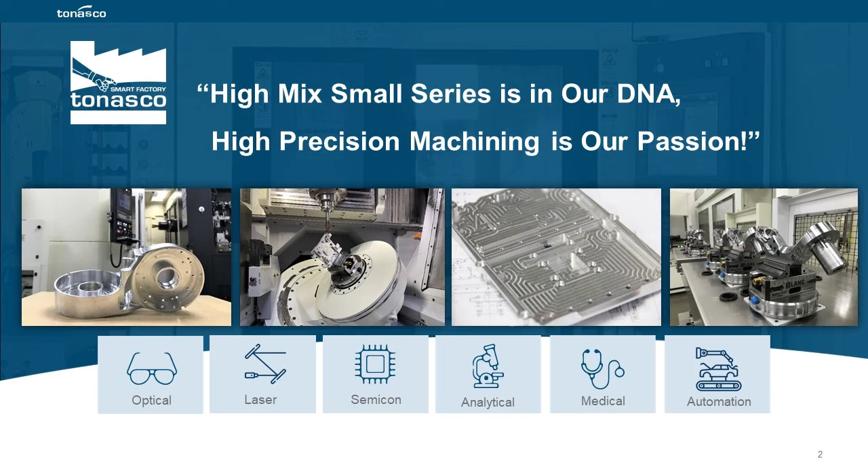And that's also why we have automated in the way how we have automated, which I will share some more later. We are good in very complex machining, high quality CNC milling, CNC lathe, and wire EDM. And we are active in a lot of high precision industries, from optical, laser, semicon, analytical, medical, and production automation.

We have implemented a lot of Industry 4.0 features, capabilities. But actually the funny thing is, it never started as wanting to implement Industry 4.0. What we wanted was to invest in high-end machines, and we saw that in order to make money with these machines, we need to automate.

And then slowly we started to add the rest of the things to it. So we have automated, fully automated, a robotized factory.

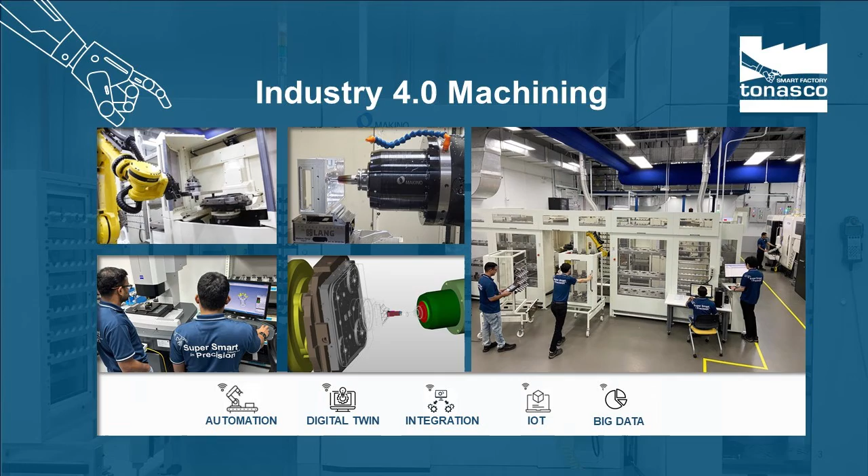We are simulating everything that goes to our factory. Most of the software is integrated, so most of the data flows from one piece of software to the next without anyone having to type it over or copy Excel sheets or any of that. And all the machines and all the equipment have IoT capability, so we are collecting a lot of data, and at this moment we are ready to start harvesting that data and doing big data analysis on it.

In this slide, I want to share what we have. You can see our hardware in the factory, but actually it's a lot more than the hardware that you see. Most of the work in this Industry 4.0 is not in the hardware, it's in the software behind it. So it all starts with our ERP system.

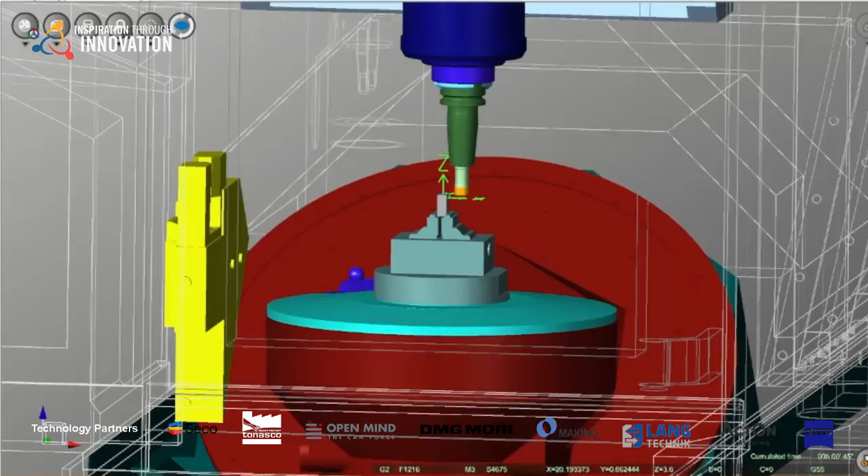The ERP system creates a job. That job goes to the CAM programmer, and the CAM programmer creates the CAM program. Then the CAM programmer simulates every program that he makes, so we can catch as many errors as we can in the office. That is first to protect our machines, so we don't have crashes, but also to find any mistake that we have made. This is all to get the maximum machine uptime.

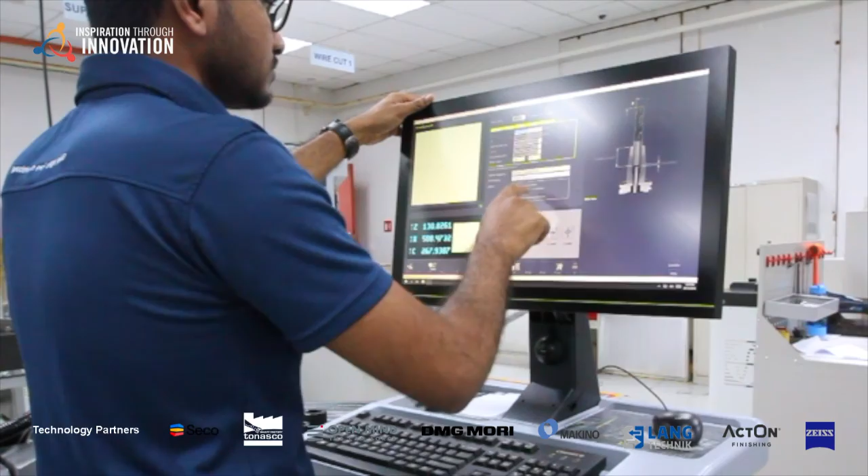Then we have tool management. We have all our tool data in a Zoller tool management database. That is all the 3D models, but also all the cutting data. And this is used in our CAD/CAM, but this is also used for our tool presetting. And this data is also sent together with the tool to the machine. So this is a very important database for us.

Then that goes to job management. As I shared earlier, we are high mix, low volume, so we have many, many different jobs. With this job management, we have a lot of flexibility. We can run different parts on the same machine in one night, and this job management software will plan that for us and manage it all for us.

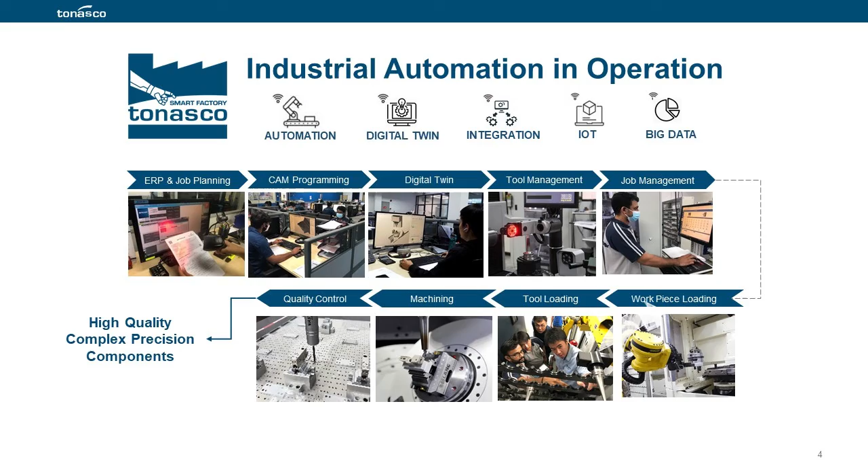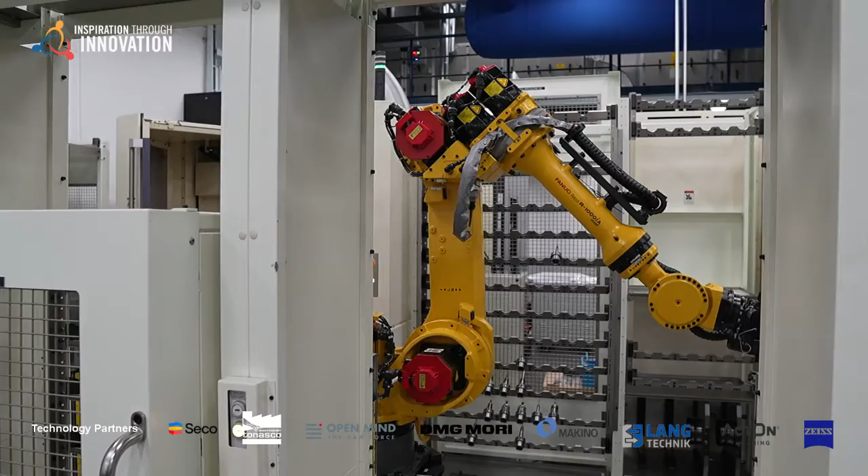Then let's go to the shop floor. We do our workpiece preparation. All our pallets have RFID chips, and all our workpiece offsets are linked to that RFID chip. Then we go to tool loading. All our tools have a QR code, and all our tool data is linked to that QR code, so the tool offset, but not only the tool offset, also parameters. Our tool life of that tool is tracked.

Does the tool use through spindle coolant or not? And then that all goes to machining. We do all this because we want to machine. Before we start to machine, the robot loads the workpiece, the robot sends the NC code to the machine, and the robot loads the tools to the machine, but also sends the offset data and all those tool parameters to the machine. So all this goes automatically to the machine.

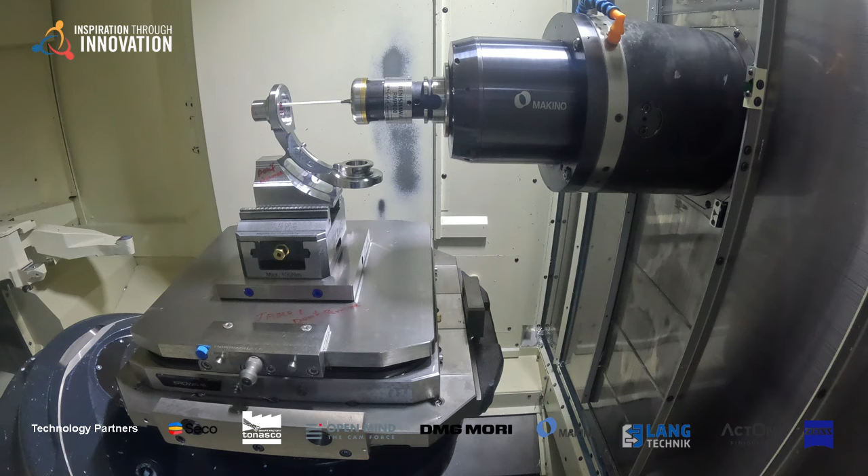In the machine, we can do quality control. So we can do probing inside the machine for the most important dimensions. And the rest we do quality control on our Zeiss CMM in our quality control department.

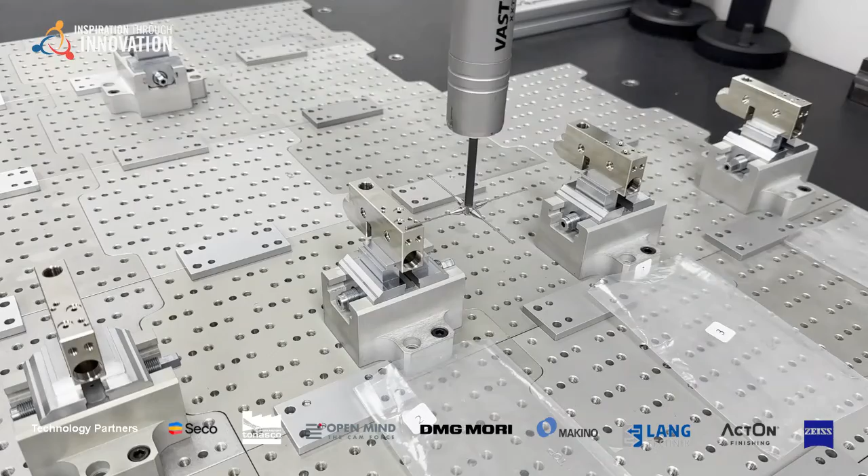When this process runs, we are generating a lot of data. And as I said just now, we are now far enough with the implementation that we can start to harvest this kind of data. The easiest is, of course, machine utilization. So we can see how often the spindle runs, how often this machine is working. But our target is to also capture the sensor data, so we're able to optimize our cutting parameters.

We have many customers visiting us, and especially our European customers are every time asking us, why on earth do you invest in so much automation in Malaysia? Aren't you here because of the lower labor cost? We invest in this automation because we really see that it gives us benefit.

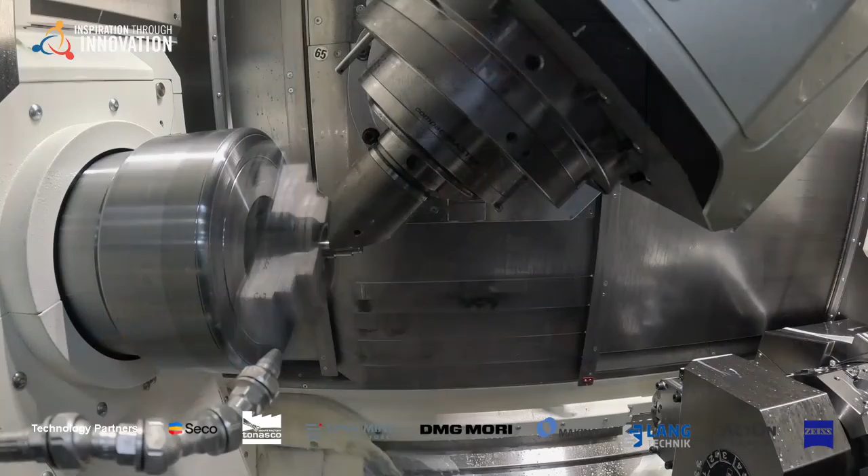This automation together with a 5-axis machine gives us a lot more capabilities. We can do 5-axis CNC milling, 9-axis mill turn, and these machines are very expensive. So my hourly rate on those machines is very expensive. And those machines have to run. If I have an operator in front of that machine, then I will never get that many running hours out of the machine as we now get with the robot.

With an operator, if we get 4,000 hours per year, that's really, really good. If I put a robot in front of it, 5,000, 6,000 hours we can get. Then we can actually make good money with these machines.

Some of the parts we run on our 5-axis machine that in the past we would run on the 3-axis with many more setups, and actually it's more economical to do it on a 5-axis machine because I can run many more hours, but I need to run the hours. Our factory runs really 24/7.

Reliability and efficiency, of course, that starts with our CAM simulation. And also the automation. By being less dependent on humans or less dependent on operators, I have less risk that someone doesn't come to work because he's sick, or someone resigns and I need to train a new operator. In all that time, my machine is down. Or we need to hire so many extra people that we always have spare capacity, which is also not economical.

High precision and quality. So we have invested in high-end machines: Makino 5-axis CNC milling machine, DMG NTX 1000. These are high precision machines. We bought them with very many high precision options, purely for us to go up in that market, to be able to do higher precision parts, more complex parts, to talk to our customer, to also get those very complex, very risky parts for our customers, to also produce that.

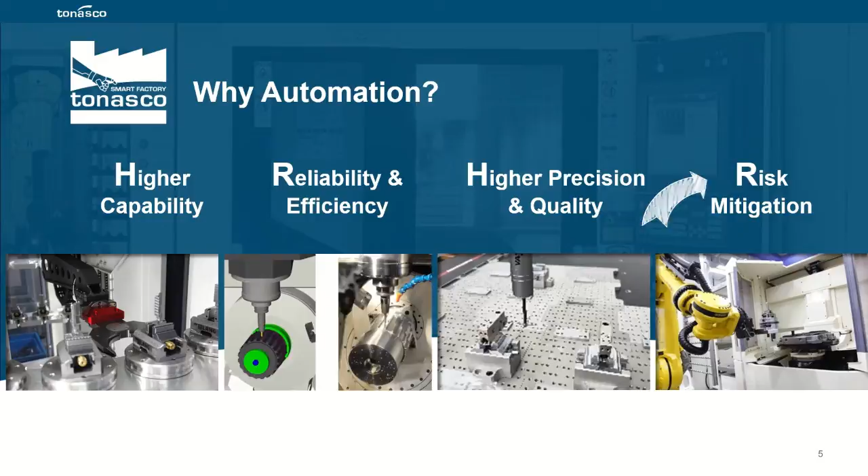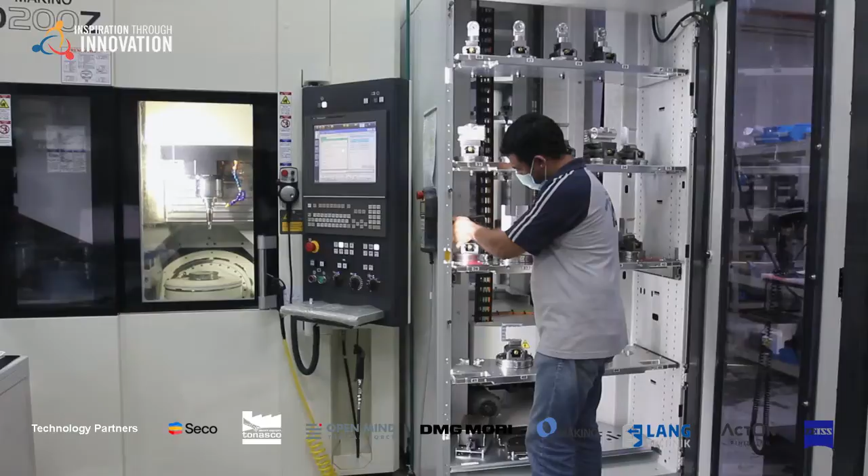And then the last one is risk mitigation. I always notice that when I talk to people about automation, it's all about hours output. But if you ask me, our main reason, our first reason why we have this automation is to mitigate the risk. I'm just less dependent on an operator. My machine can run as long as I have someone who can set the machine and who comes in just to clean the machine and make the machine run. So I'm less dependent on people.

Why we spend, for instance, so much time on our Zoller tool database, our digital twin, is because a lot of the knowledge is suddenly captured in the database. In the past, before that, every programmer had their own set of cutting parameters. And every programmer had the tool length he wanted, and none of it was stored. Now we have a fixed set of cutting parameters. If the cutting parameters don't work, we change it in the Zoller tool database, and the next time I make a program, I automatically have the right cutting parameters. So a lot more knowledge is stored in a database instead of in someone's head.

As I said just now, already it is a lot less risk that someone is sick or someone leaves, so I have a lot less attendance risk. And the last one, and that I find also very important, you see our environment looks good. We want to make this company attractive for people to work here, to retain the good people that we have, and to attract good people. And everybody loves to work with robots, and everybody loves to work with high-end machines in a high-end environment. So that is the last reason why we do this.

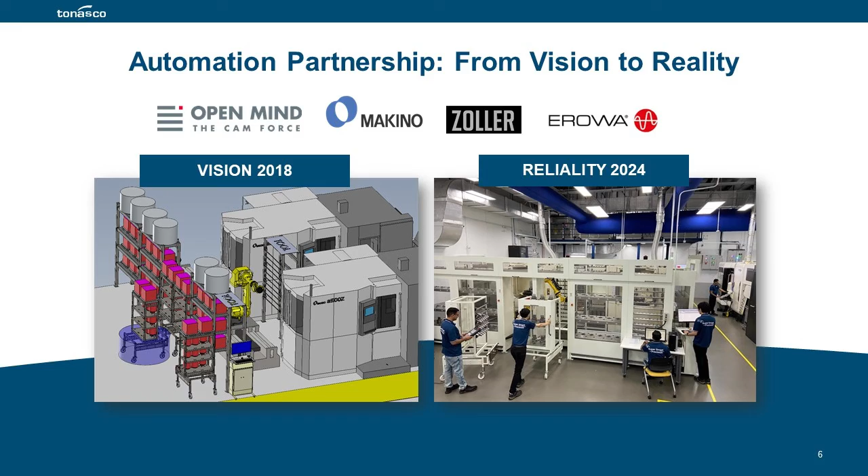And with automation and with Industry 4, we can solve this. But we couldn't do this alone. We had a lot of ideas, but we needed partners. And that's where we started to work with OpenMind, Makino, Zoller, Erowa to implement this. And by working together with them, we became as successful as we are today.

I've invited Simon from OpenMind and Samuel from Makino to later also share some things with you, because I want to continue with what challenges did we have, what lessons did we learn, but also what things did we do right. So I will first share some things from our experience as Tonasco, and then I'll pass the mic to OpenMind and to Makino to share their point of view.

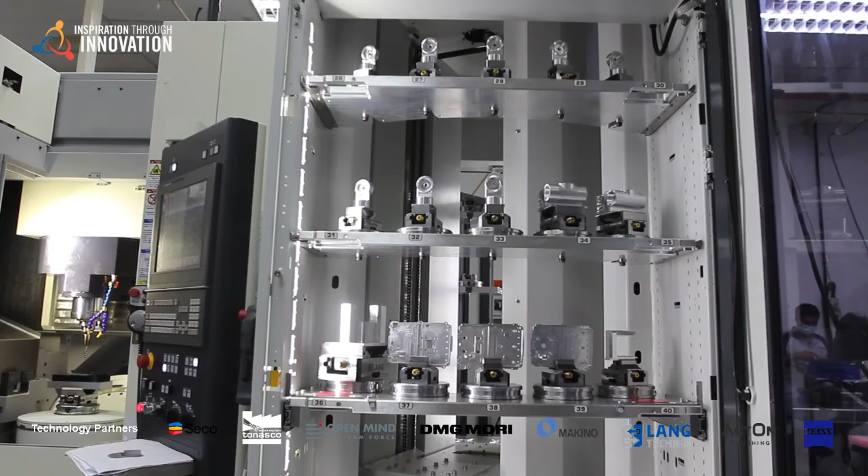So what we did right, absolutely right, is standardization. You cannot robotize if you don't standardize. So we standardized - everything is on a pallet. Everything is on an Erowa 0-point system. We only have the same type of vices. We only have the same type of tools. All our tool holders are standardized. Everything in our company is standardized.

Without that, I cannot simulate. Without that, I cannot automate, because I don't know what's going to happen.

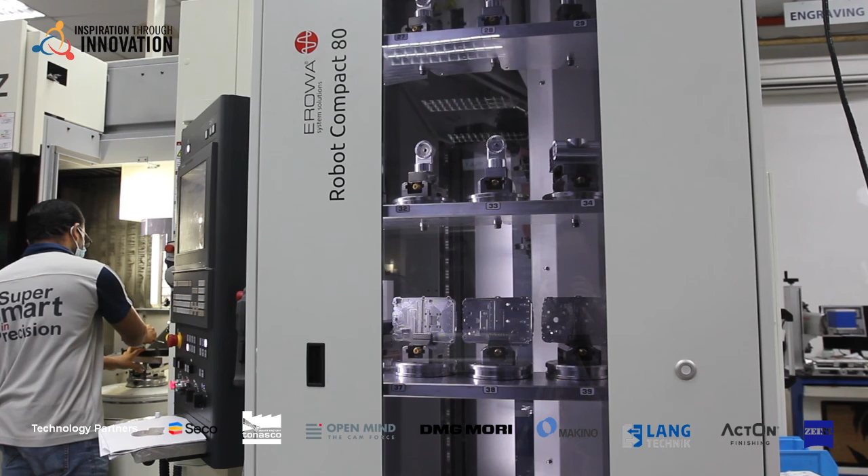Then, the next is, we started with one concept machine. So we bought a Makino D200Z machine with one robot for pallet loading and one robot for tool loading. And we got the concept right first. That machine we got in 2019, and we have worked until 2022, till the next machines came in. So we really ironed out many of the problems.

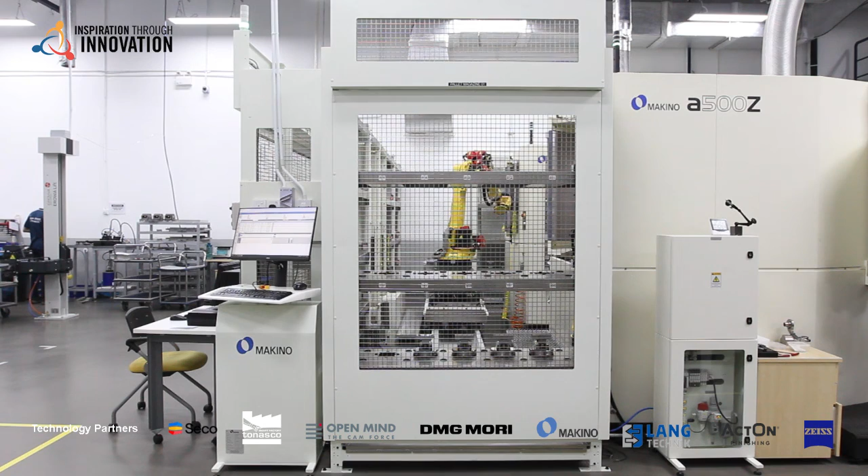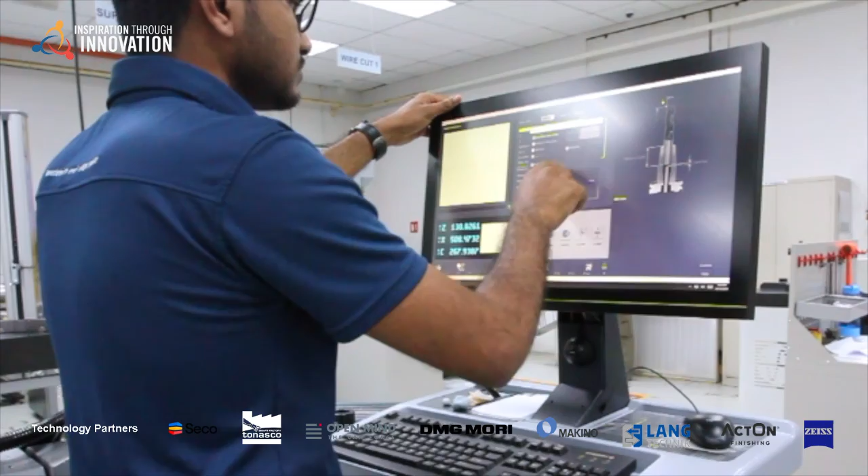And some of the challenges that we had was actually our digital twin, our simulation, our Zoller tool database. We thought when we started, okay, maybe 6 months to fill that whole database. How difficult can it be? In the end, it took us 3 years to update all the 3D models, because we needed to get all the 3D models. All the 3D models that we got everywhere were not 100% right, or when we load them in, it gives problems. And so we spent a lot of time on that.

Then we need to get the cutting parameters. Of course, I can get cutting parameters from Seco or from others, but we still need to test those cutting parameters and make sure that what we load into our database is really optimized. That took a lot longer than we had expected.

The last portion is employee involvement. We have from the start worked together with a small group of employees that were very involved. That went very well. I would say that we have done right.

But now we have the following challenge. We need the rest of the company to also get involved. And now we are really trying to figure out, well, how can we train the rest who has not been part of this journey for the last 5 years, but who steps in now and needs to know all the knowledge that is in the head of our people that was part of the core team.

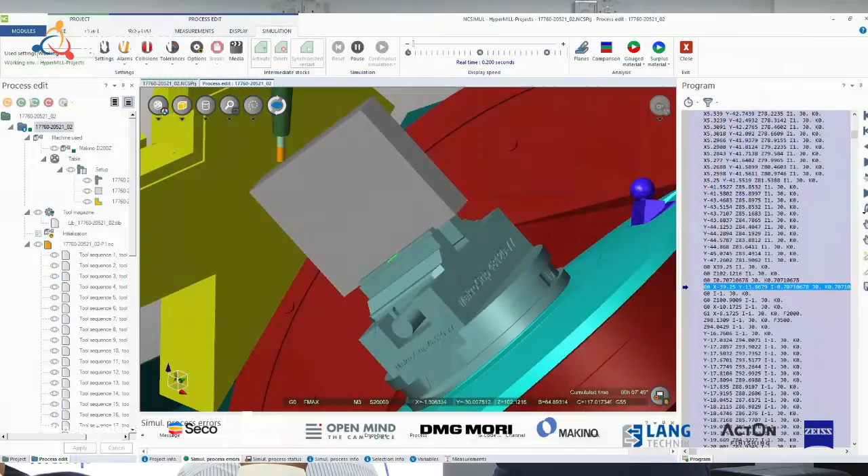And what we do realize is that this whole implementation, not only the digital twin, but everything, it takes a lot more time than I had expected. I think if I would do it again, I would probably get at least 2 or 3 engineers involved full time. Then we could go a lot faster and we can get all those benefits that we see a lot sooner.

The last point we have is manpower. If you go on this journey, not just automation, but especially that integration and that whole Industry 4.0, you need to be ready to get higher level people and different skill sets. We already started in 2018 to hire a different kind of people, higher level people. And even today we see that we still have some issues, that certain staff are very good in this, but cannot cope so much with that. It's very complex what we have put in place. We see that we have to change our job scopes, rearrange who is doing what in this factory. So this is what I wanted to share.

And yeah, I'm very curious what OpenMind has experienced during this journey together with us. So I pass the mic to Simon. Thank you, Toon. Next slide, please.

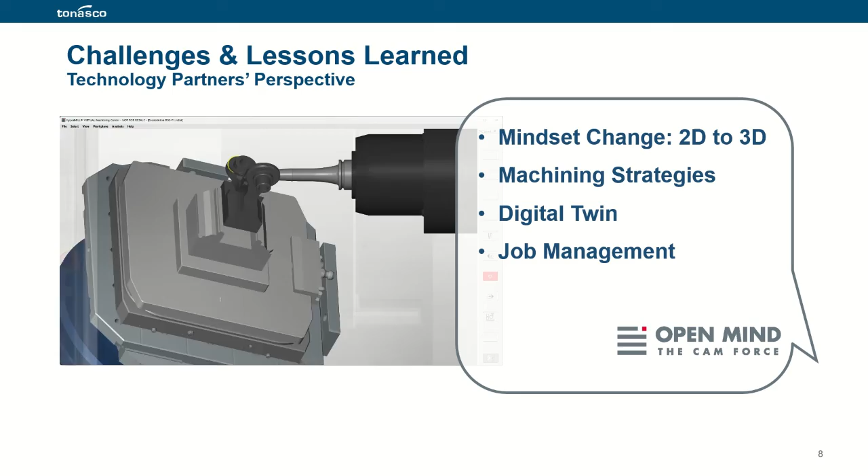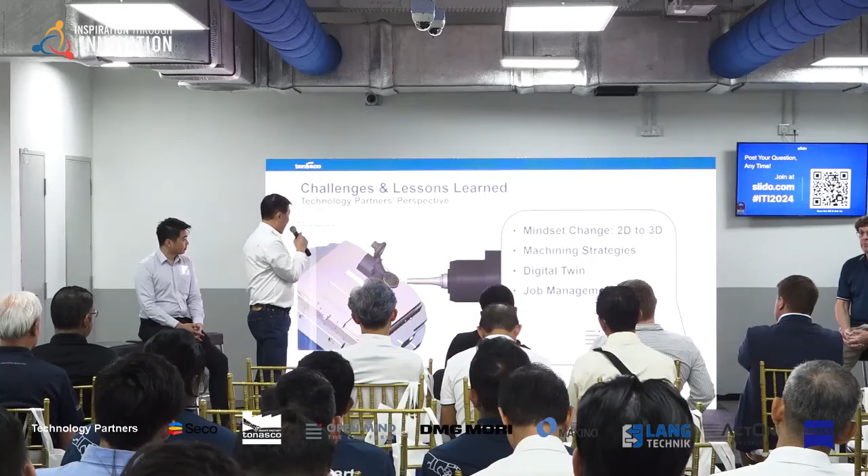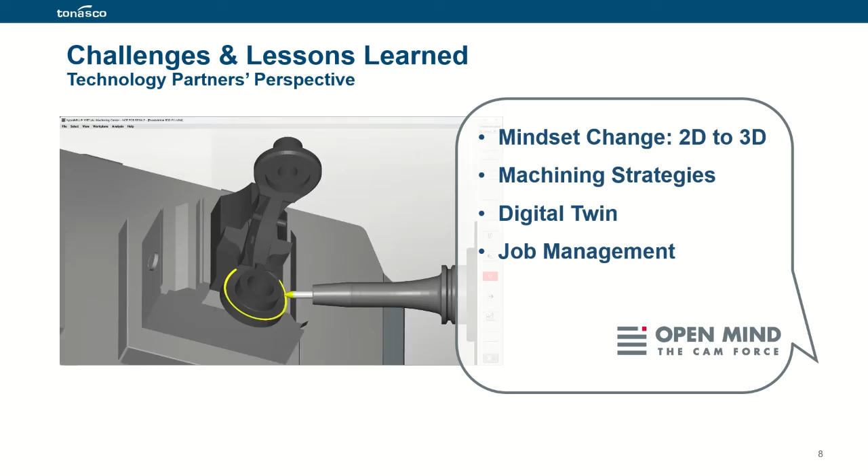Through this journey together as a supplier, OpenMind, and our customer, Tonasco, we have learned a lot as well. These are the experiences, the challenges that we have encountered. First of all, it is about the mindset change. So what does it mean by this?

Often, in the beginning, these people, the programmers that Tonasco has, they are good programmers, honestly. They have used the previous software that they have. They are so quick, they can produce the NC programs, and they are a lot more flexible to do whatever toolpath they wanted to achieve. But the setback is that a lot of time it is very much depending on the shop floor. They need to confirm and confirm again. So with this, it is taking time for them to do this, and importantly, it is very risky because there's no collision check on 2D program, with a 2D sketch.

So therefore, we have gone through a lot of time to tell them that it is important to use 3D, because with the 3D, including the tooling, this is why they are investing into the Zoller, to collect all the data of the tooling, and then it is used to check with the machine travel strokes and so on, in order to find the correct travel stroke, and in the end also using a good machining strategy that comes from hyperMILL, which is able to provide them with very nice 5-axis simultaneous machining. So this is in order to drive their 5-axis machine from Makino.

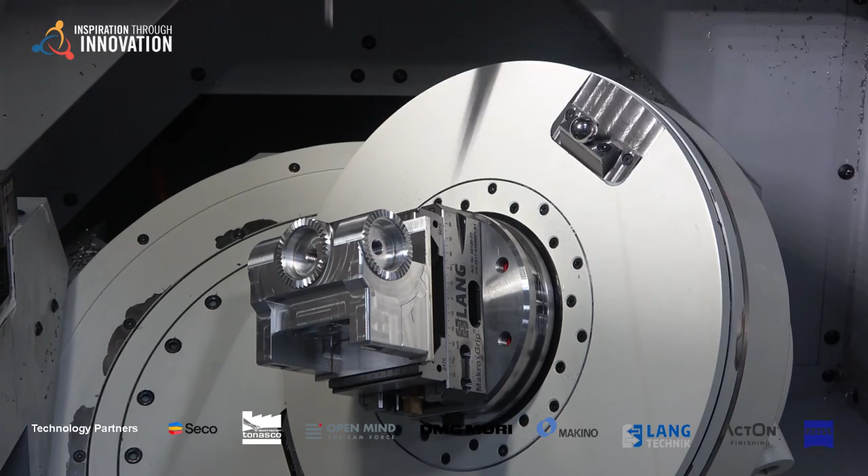This is what they are able to gain, but we spent so much time to debate why this is so important. In the beginning, they were just telling that their shop floor engineer would like to do the test, and then if this is not enough, they will manually prolong to make the tool longer or to make the tool shorter. So with this one, it is very, very dangerous.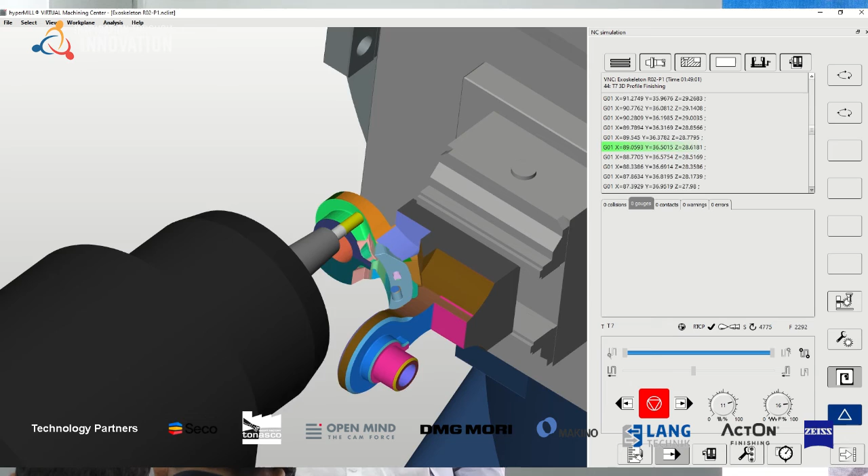Very dangerous. Therefore, they also invested into our virtual machining, which is a so-called digital twin, to confirm each movement, and also to give this kind of intelligence that the optimizer is able to decide: when the tool is coming from this direction and it is unable to reach, is there a second solution? So this optimizer is taking place to decide for the programmers. Therefore, the human decision is less. So everything is put into the system to check for a better solution. So this is about the digital twin that they can gain from this.

Finally, going towards the goal to achieve automation, the job management is the next key thing. So to provide this information, OpenMind also provides the important information so that this job management can carry on to provide the information for the next process. So this is where Makino comes in.

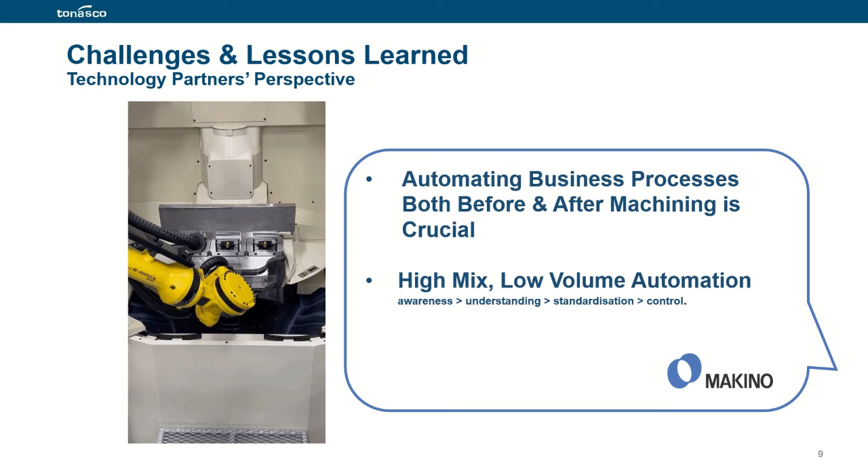Thank you, Simon. Samuel here from Makino. Thank you for this privilege to share about this automation journey. I think Mr. Toon has already encapsulated a lot of the points from earlier very well, in terms of how he standardized first and how he got his concept right first. So today, from Makino's perspective, we will just share on 2 points: the first being automating the business processes before and after machining, and the second being a high-mix, low-volume environment that we're working together with Tonasco to realize.

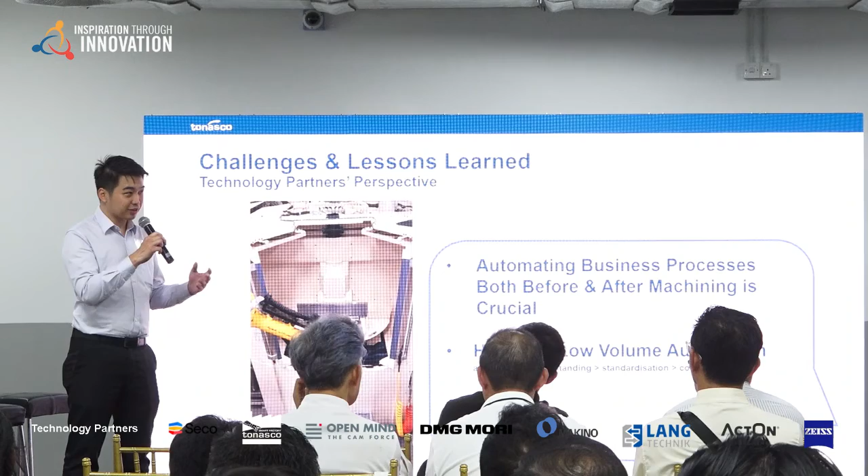So on the first point about automating business processes, that's what Tonasco experienced in terms of the time spent to standardize their processes, align everything, and connect all the software together, spending 3 years on the digital twin. Let's just say this is hardly rare, it's hardly unique to Tonasco alone.

It's probably not. So the automation journey, which includes your process digitalization journey, inherently takes time. If you look at your own company, essentially how you run your operation is like the DNA of your company. You want to be on top of that, not leave it to a software you have no control over. So here I'd like to do a shout out to Mr. Toon, because the other thing he's done right, which he didn't mention because he only mentioned his employees, not himself, is that he's been very hands-on from the beginning all the way until now, as we are learning together.

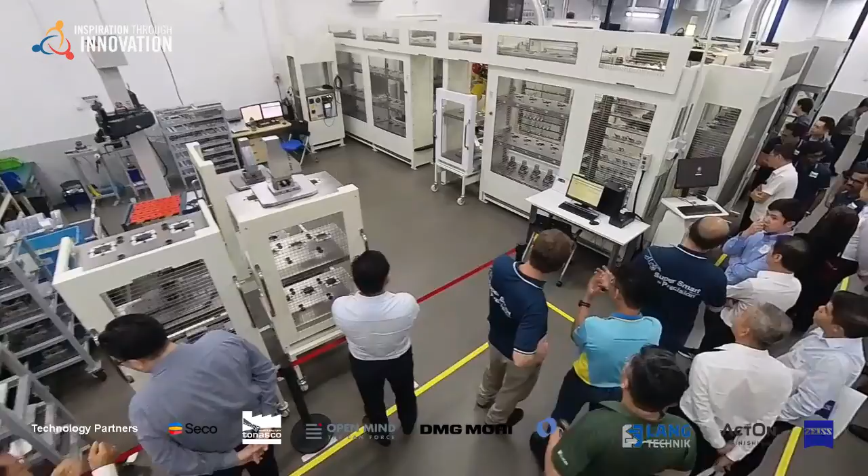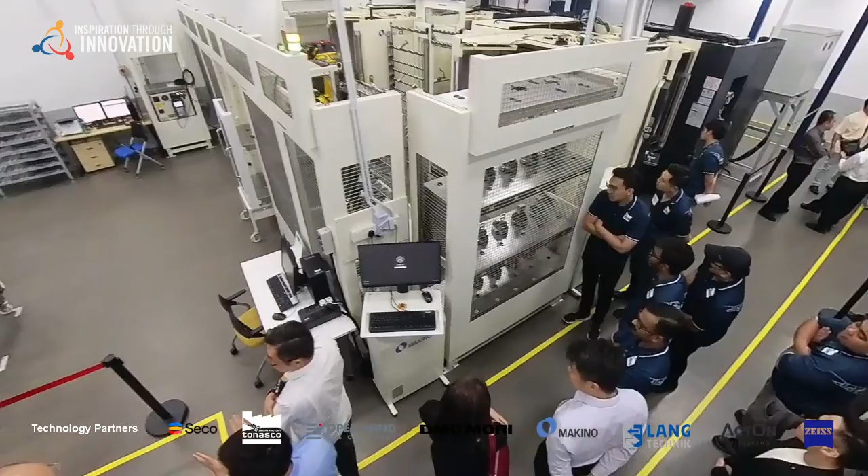To design and architect the whole system and how it's supposed to come together, so that all the different business partners you see today, and in fact more than what we see today, are able to come together and the whole system works. This is something like a case study we're sharing today. So let's keep it down to earth - a lot of buzzwords being named today, but does it work? To be down to earth, yes it works, because of the number of hours spent and also the architecture, which includes all the business process re-engineering that's gone through over the years.

So the second point I'd like to talk about is high mix, low volume. The job nature in Tonasco is high mix and low volume basically - we're talking about batch productions in very small quantities, but that does not mean the accuracy requirement is any lower. In fact, looking at the trend in the parts we're talking about even today, the requirement for accuracy is only getting higher, and Tonasco has every intention to step up the game in terms of this accuracy requirement.

So if you talk about automating tools, you control your job, and in this case the software does not just control the parts or the machines - we control the process and we also control the tools. So when you load a tool that was used for job A and move over to job B, under such high mix conditions, how do you ensure the accuracy of the part you produce in the end? It requires a lot of information and data from an earlier stage of the process chain that you can store and retrieve and implement in your next job.